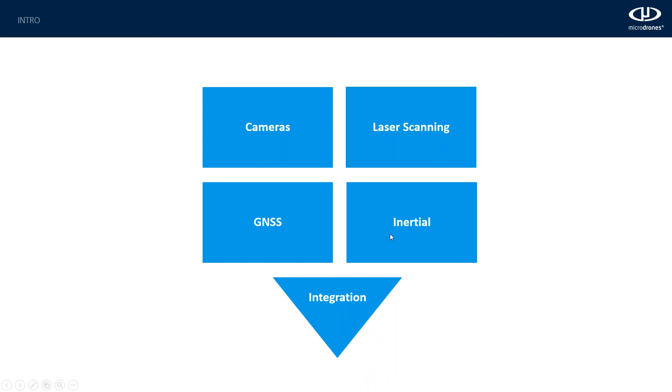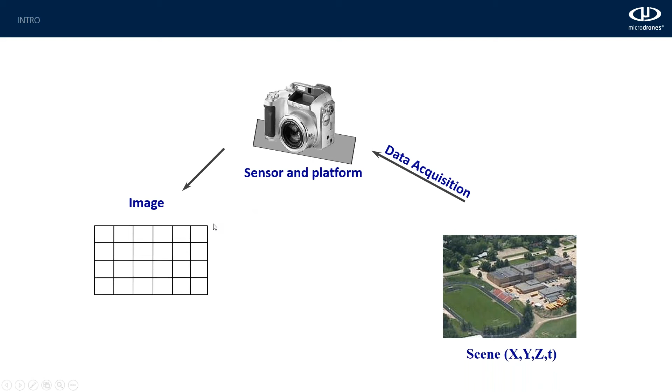Our concept here is to focus on integration rather than invention. We integrate well-proven technologies in the form of sensors such as cameras, laser scanners, GPS, and inertial measuring systems. The way we do geospatial in general, conceptually, is we acquire the data of a natural scene in 3D as an XYZ at a certain moment of time using a sensor on board the platform. The data turns into a group of pixels we call an image. Once we do the necessary data processing and adjustment in the form of 3D modeling, we bring back the 3D natural scene at that moment of time into our computers.

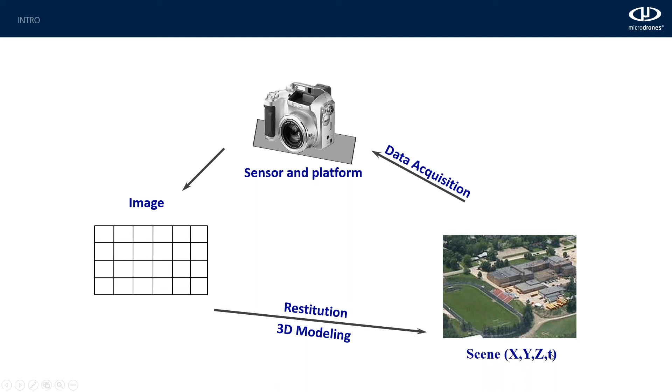A quick introduction on the sensors. We categorize sensors as active or passive. The active sensors produce or launch a pulse, and that pulse returns back to the sensor, collecting information, such as laser scanners or radars. Passive sensors, such as cameras, release a shutter and collect an image directly.

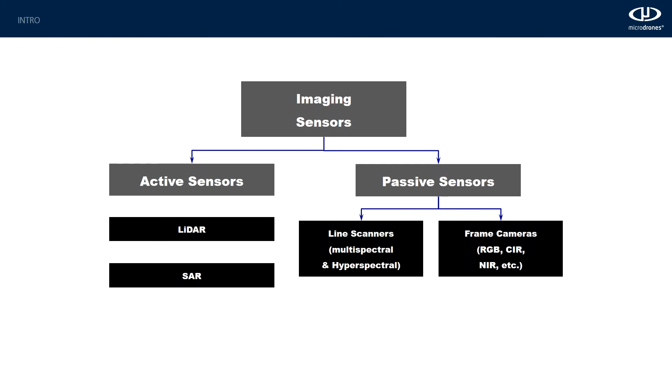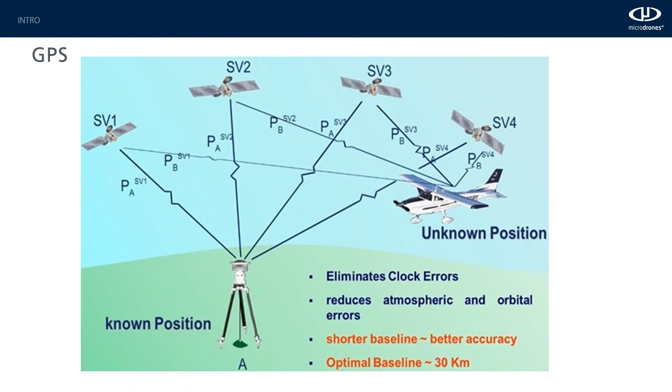GPS has been used since the 70s when it was invented, in many applications. It started in the military domain, and it actually ended up in the civilian domain in the late 80s. You now have it in your watch, in your cell phone, in your car for navigation purposes, for recreation purposes like hiking and biking, as well as what we do with it in the precision mapping field.

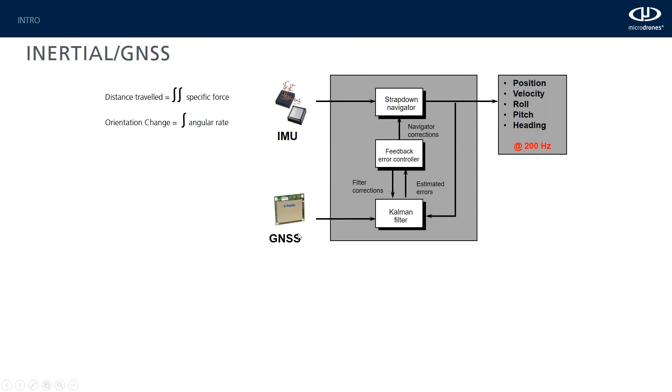We integrated inertial measuring units together with GPS in order to determine the position, velocity, and 3 angles - roll, pitch, and heading - of any platform, either driving or flying. In our case, the drone is flying at 200 times per second.

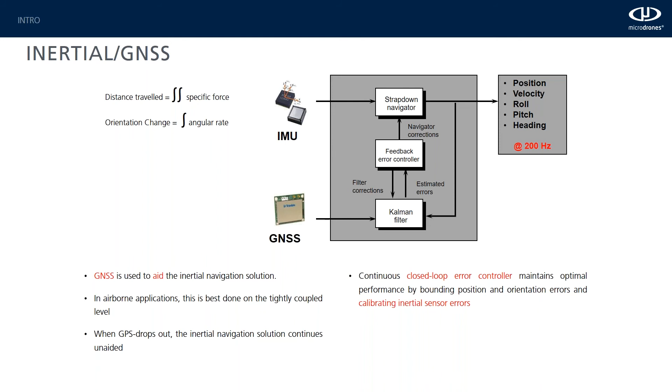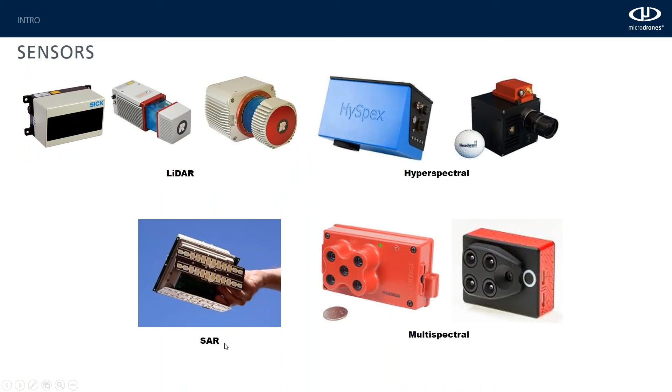Applications - believe it or not, one of the applications used most in the geospatial industry is automotive. Folks at Toyota, Ford, Audi, BMW, and so on use multiple sensors in a great assembly - cameras, lasers, and radars - and integrate that to help with the design of the vehicles, as well as aerodynamic studies and crash testing, and so on.

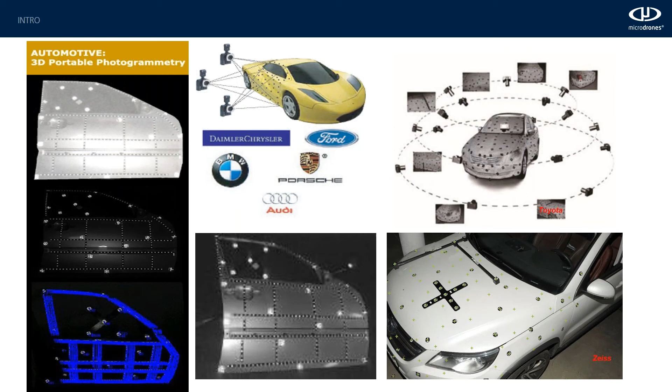In aerospace engineering, the picture on the right shows the polka dot test recently done by NASA, US Navy, FAA, and DLR, the German space agency, a collaboration to crash test a vehicle. The dots all over the vehicle body are measured down to sub-millimeter accuracy.

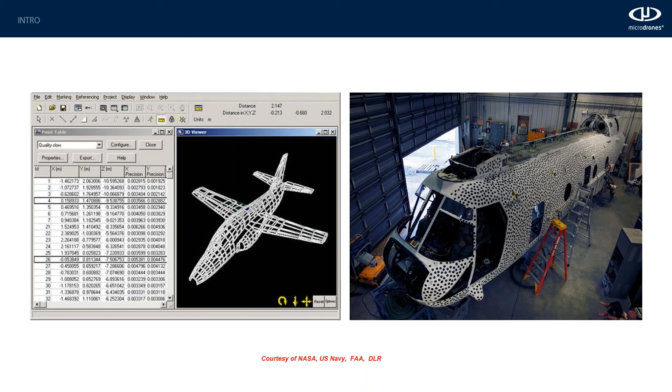In the geospatial field, we use geospatial science in the form of airborne mapping, either manned or unmanned, which is the topic of our webinar today, or mobile mapping on the ground.

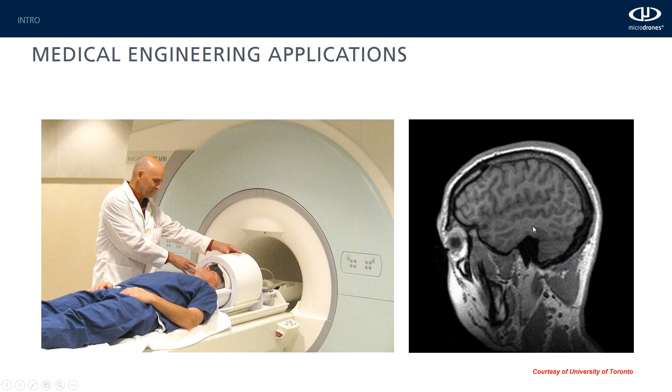As far as products are concerned, we end up with something called orthophotography. The picture on the left shows a typical airborne image where you can see the sides of buildings, and the orthophoto version, after a certain processing workflow, becomes a high precision map that doesn't show the sides of buildings.

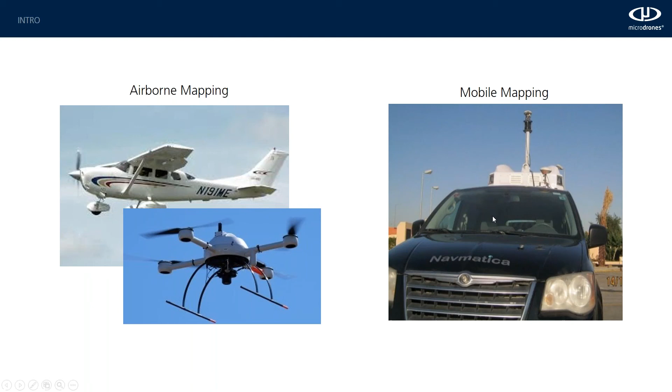This is a topographic 3D model, a triangulated irregular network showing the break lines, and a standard 2D planimetric map. This is a LiDAR product called a 3D point cloud, showing high tension transmission lines and their towers. The last picture shows a 3D photorealistic city model.

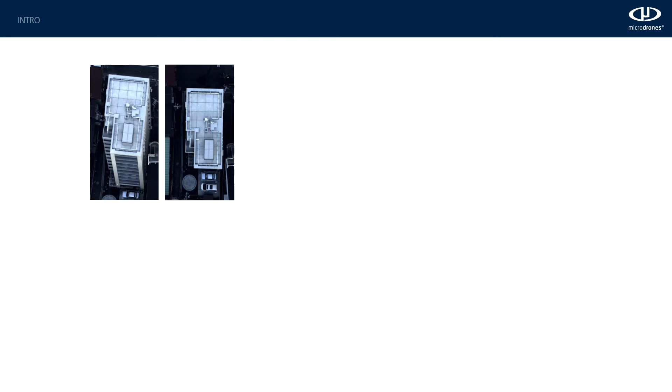As far as the data is concerned, we have digital frame imagery, video imagery, and LiDAR, or laser scanning imagery. You can tell from the picture on the left that the precision, because of the density of the 3D point cloud, is so high you could imagine it's an image, although it's not.

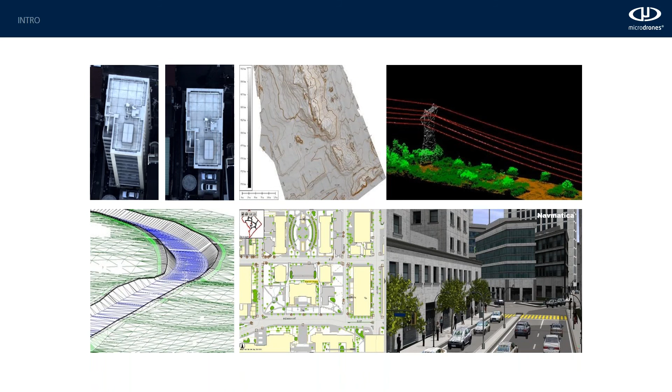So now you have a sense of how this technology evolved, where it came from, and where we are today in terms of using it for surveying and mapping. Chuck Dorgan, our sales director for the U.S., has traveled the far corners of the country for the last year and a half, discussing these topics with customers and companies interested in employing this technology.

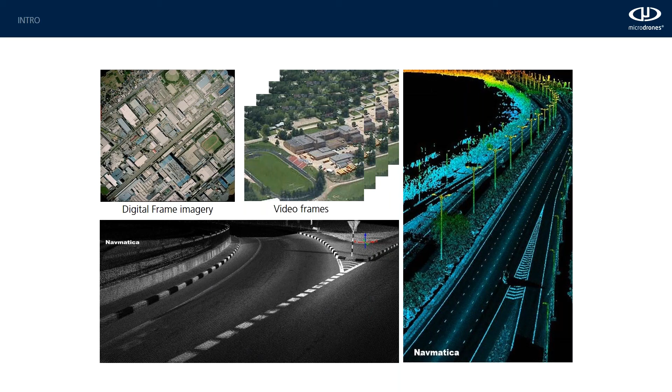So we're going to start the Q&A section of our presentation. Question number one, Chuck: why use drones for surveying and mapping? Why would I want to consider this? Great question, Mike, and I hear this very often.

It's quite simple. It saves time, gets more done, improves worker safety, and takes away from parts of the job that are dangerous, dull, or dirty. It's more competitive—people are asking for drones for surveying. I've had customers literally come to me and say they need to be using drones because some of their biggest customers are asking for it. It also lets you collect data without shutting down regular groundwork, which touches on safety as well.

And for all the surveyors on the call, with our DG solution, which stands for direct georeferencing, you can slash post-processing times and eliminate the need for GCPs. Mohammed will talk a little more about that after my presentation.

What about the Juniper Flats Basin Survey project you recently worked on, Chuck? Oh yeah, this is a great project out in Riverside County, California. The Riverside County mission statement for this project was to protect people, property, and watersheds from damage and destruction from flood and stormwaters, and to conserve, reclaim, and save such waters for beneficial use.

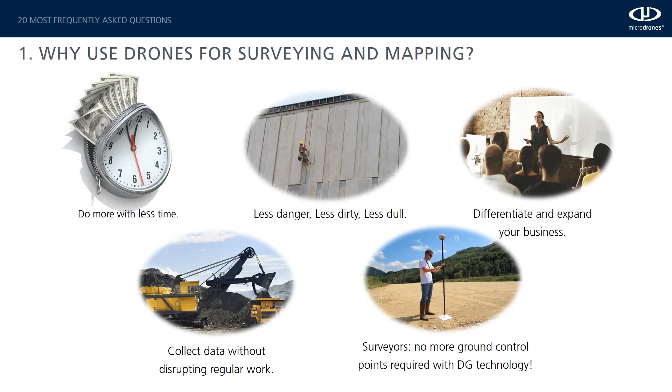The key question from them was: was the reservoir built to specifications? This project was nice because some of the survey work had already been done, so they could compare what we did side by side to what was already done.

So why use the mdMapper1000DG? First, you're getting survey grade results—it's very accurate, and it's fast to collect and process the data. One contributor to that is not having to install ground control points. Some important benefits are that it condenses the project schedule from weeks or months into one day. This is live data from an actual project we did side by side.

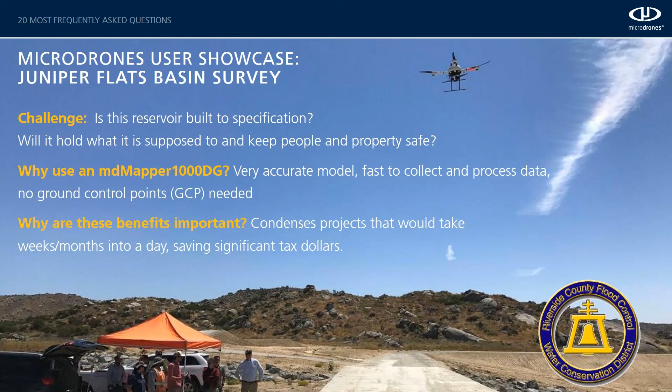Here are some of the flight profiles and parameters. We surveyed and mapped an area of 37 acres, flying at a height of 120 meters (400 feet), the maximum height allowed for small UAS in the United States. The flight speed was 6 meters per second. We took 72 images, the GSD was 1.7 to 1.8 centimeters, and the flight time was only 8 minutes.

So literally less than 2 hours later, after collecting all the data from the job site, we have a digital surface model. For those that aren't in the surveying business, it might not look very attractive, but the supervising land surveyor, Joshua Tremba, was ecstatic with these results, and was shocked by how quickly we could do this.

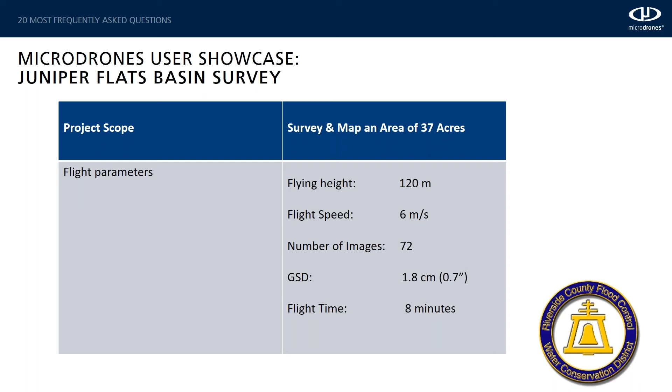So this is a key point here. Collecting imagery and showing some pretty pictures isn't much unless you have accuracy. You've got to be able to meet the customer's requirements.

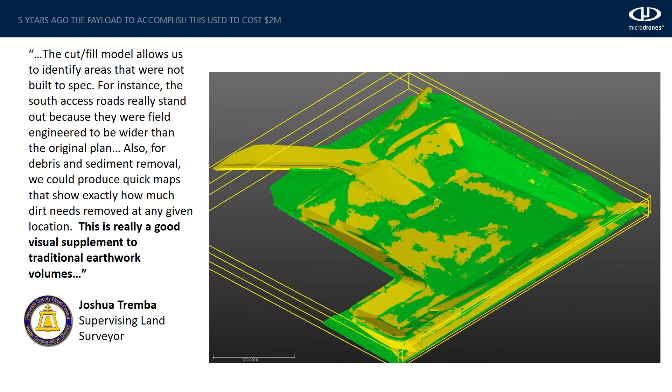So for this project, we had 11 points on the project. One was the ground control point that we used in processing the data. The other 10 points were just used as checkpoints to check our accuracy. And the accuracy actually fell right within our advertised accuracy of 1 centimeter in X, 2 centimeters in Y, and 5 centimeters in Z. So very good results.

All right, Chuck, thank you. What about getting started with using drones? It sounds complicated. Is it?

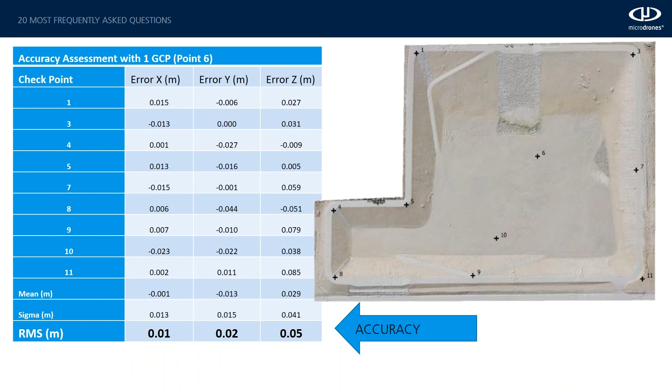Is it hard? No, it's very easy. I have to give props to the FAA for doing a good job of turning the ship around, because it was not easy back in the day. But in August of 2016, they introduced Part 107, and it is really easy now. Just about anyone can go out there.

Basically, you want to find a UAS that's a good match for your application. A hint would be a salesperson should start asking you questions about your business and not so much about the specifications of the drone. It's important to meet the needs of your customers.

Getting your Part 107 remote operator's license, which I'll talk about in more depth later. Learn to use your drone system, and that's one of the things we focus on. It's one of our core competencies, our MD Academy. We're great at training our customers. After MD Academy, you're fully qualified to fly missions, plan missions, fly them, and collect the data. Most flights are automated, so it's very easy to get started.

And MICRODRONES technical support has a turnaround time within 1 business day when you have questions or issues along the way.

What about regulations, Chuck? Well, I gotta say they're pretty straightforward and easy to understand. It's not a long list of regulations you need to know about. There's a few and they're easy to know.

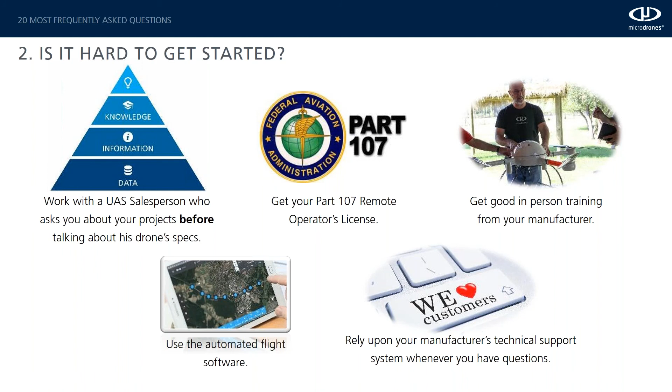The first one is you have to pass the initial aeronautical knowledge test at one of the 690 FAA test centers around the country. On their website, you can pull up a PDF listed by state. I'll be more than happy to share that with anyone who has trouble finding it.

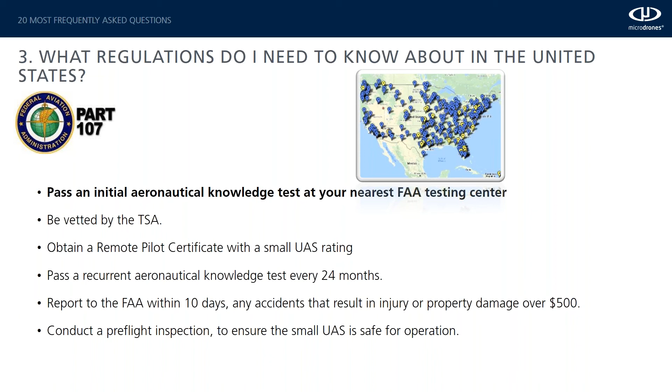You have to be vetted by the Transportation Security Administration. Obtaining a remote pilot certificate with a small UAS rating, like existing pilot airman certificates, never expires. And you have to have a recurrent aeronautical knowledge test every 24 months. It's more of a little refresher.

You have to remember to report any accidents to the FAA within 10 days of any operation that results in an injury or property damage of over $500.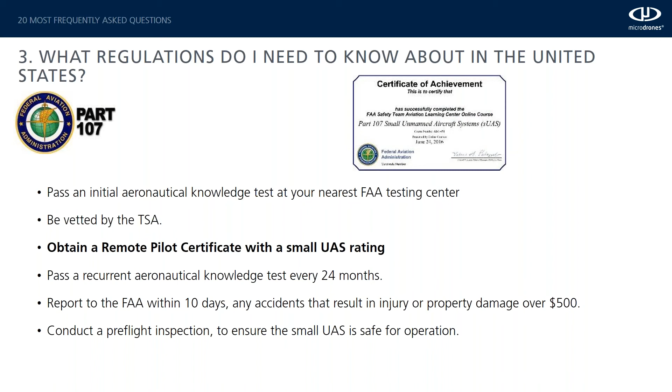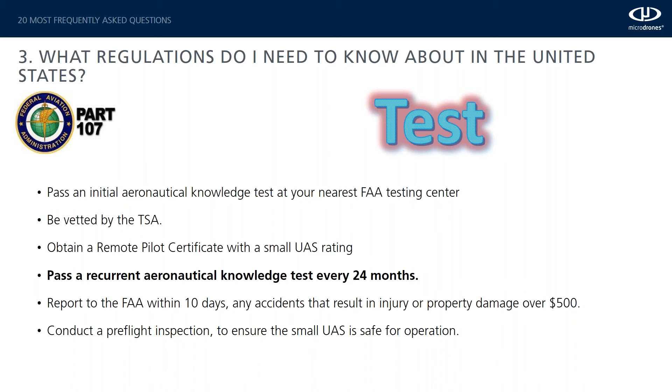And conduct a pre-flight inspection to include specific aircraft and control station systems checks to ensure the small UAS is safe for operations. MICRODRONES provides this checklist with all of our systems, so we make it easy for you.

And in some of the other basics, for most of these, you can apply for a waiver, and if you have justification and mitigating controls, you usually can get these waived.

But you must fly during daylight. You can't be flying after dusk. You have to fly under 400 feet; this is the ceiling for class small UAS. You have to establish direct line of sight, no flying beyond line of sight, no flying in national parks, no flying directly over people. A lot of it's straightforward, common sense.

Now we provide this Cliff Notes overview of what the regulations are, but obviously the Federal Aviation Administration website is your best resource. So we provide the link here. Anybody who needs that after the call, send us a message and we'll get it to you. And when you go to their search bar, you can enter the keywords we have here and you'll be able to find everything you need related to becoming a pilot.

Chuck, what about when someone decides to work with you or with MICRODRONES, will they have help along the way or do they have to figure it out on their own? Oh, they'll have all the help they ever wanted. That's probably one of the things, one of the feedback I get back from our customers all the time, is how helpful we are.

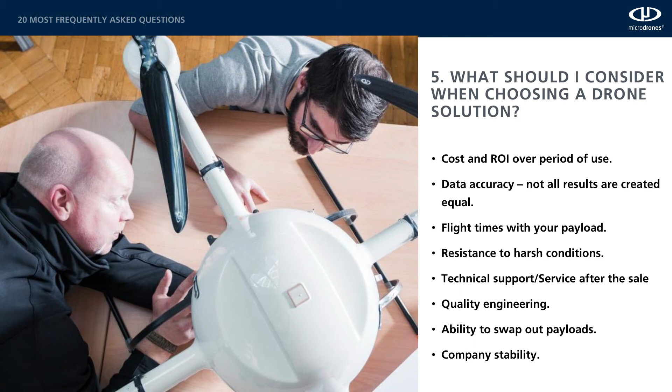The marketing and PR support, MICRODRONES has a world-class marketing department there to help you with your business, and customers love it. We're there to support. What other things should people consider when they're choosing a drone solution? There's a lot of products out there in the market. What are the main things to think about, Chuck?

Good question. Cost over time and ROI are obviously key factors. Data accuracy - not all results are created equal, make sure you choose a professional system. There's a lot of systems out there that folks would look at because of the price tag, but at the end of the day, if your data is not accurate, then you've wasted your time.

The flight times with specific payloads are probably one of the very first reasons why folks will turn to MICRODRONES. We have industry-leading flight times. Resistance to environmental changes - temperature, heat, cold, wind, rain, all that kind of stuff is important. You don't want your drone, your investment, to be destroyed by adverse weather.

Technical support, quality engineering, ability to swap out payloads is another key thing. I call our MD4 1000 kind of like the Swiss Army knife - you can do lots of different things with it. And company stability - how long has that company been in business? There's a lot of overnight businesses out there. It's the Wild West, so be careful and do your research.

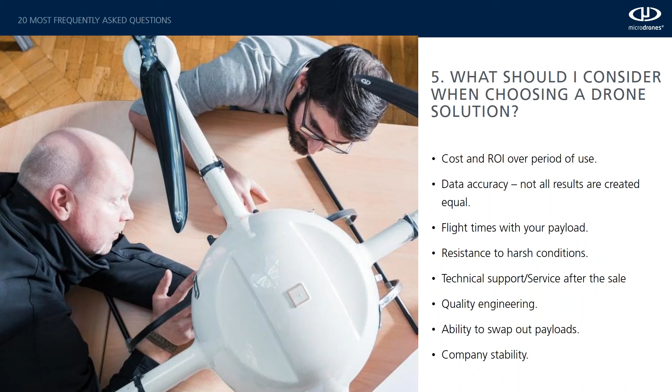Thank you, Chuck. What about the difference between buying a drone to do work and buying a complete UAV solution? What does that term really mean? That is a really good question. There's a lot of confusion out there with that because there is a specific difference between them. A drone is an aircraft.

If you have an aircraft and you want to do something with it, the user must figure out what sensors to use, how to integrate it, how to mount it, the software. There's a lot of science behind it, and MICRODRONES has taken all that out - we've done it and figured it out for you.

A UAS, unmanned aerial solution, is different than a drone. It's a complete UAV solution like MD Mapper that includes everything you need to perform specific applications. So we've done all the hard work for you. It's taken us years to master it, but we've done it, and we've done it with the latest and greatest technology.

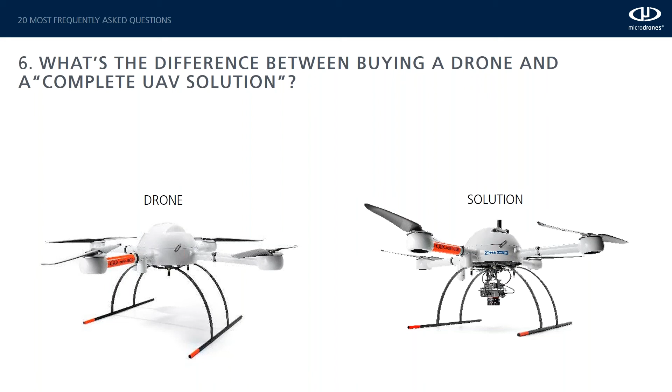So in terms of microdrones, Chuck, what complete surveying solutions do you offer today? We have three packages here. Starting from left to right, we have the MD Mapper 200, using the MD4 200 airframe, which carries just over a pound, has a flight time of 15 to 20 minutes, and covers about 70, 80 acres of mapping acreage on a single battery charge.

The MD Mapper 1000 is the MD4 1000 airframe with an Alpha 6300 camera underneath it. It's a 24 megapixel camera, so it's professional grade. You get fantastic results with it, but you do need to install ground control points to use it.

To the far right, probably our best seller in 2017 so far is our MD Mapper 1000 DG, which stands for direct georeferencing. That's again using the MD4 1000 airframe, but it has a Sony RX1 R2 camera, which is 42 megapixels, and it uses the Applanix APX15 board, which has its own dual GNSS receiver and IMU, and does not require ground control points.

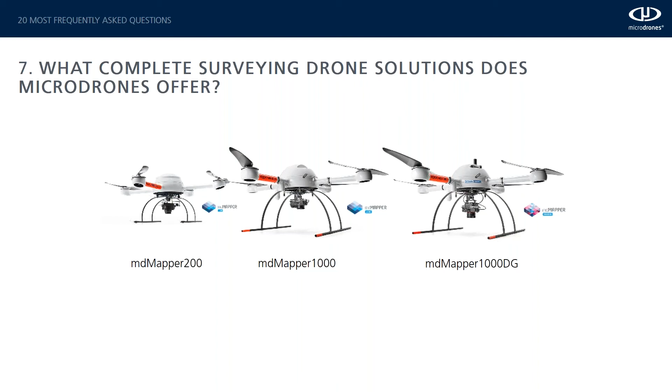There's a question here on how MicroDrones Mapper solutions save time in the field. So we have a side-by-side comparison between the Mapper 1000 and the DG. Looking at the time savings, the very first one is not having to install ground control points, and it's roughly 2 hours, give or take, whether it's 1 hour, 3 hours, or 4 hours.

It's a big chunk of time that you have, so you'll get about a 2 hour savings in this scenario here.

The flight time is 35 minutes for the Mapper 1000, where you can reduce that with the Mapper 1000 DG, saving you 20 minutes. The data processing is 12 hours for the Mapper 1000, where the Mapper 1000 DG is only 4, saving you 8 hours. So if you total this whole thing up, you're looking at 15 and a half hours for the Mapper 1000, 5 hours for the DG, saving you 10 hours and 20 minutes by using the DG system.

And I think, Chuck, in terms of the data processing, typically it's about 40% of the time is work and prep, and the remainder is processing time or rendering time, correct?

That is a great point. So what Mike has brought up is it's not push button. 40% of that time you're seeing there, you have someone at the computer that understands the data, doing some work, identifying the ground control points on the ground and so forth. So it's not a push button and walk away and let the computer just grind away at it. About 40% of those times are manual, but the remainder is the computer doing the work too. So that's a good thing.

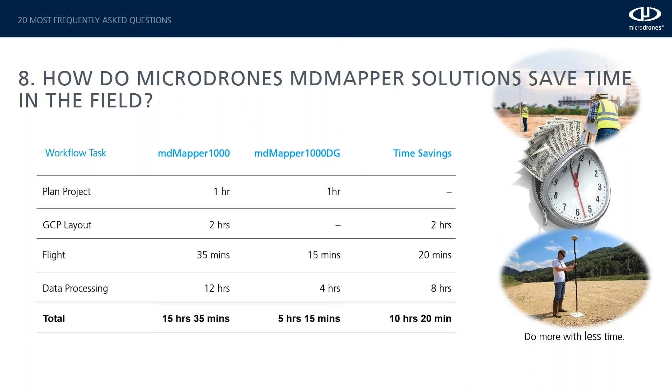How long do MicroDrones UAVs fly on a single battery charge?

Industry leading. That's, like I mentioned before, one of the main reasons we get contacted is because of those industry leading flight times of 30 to 45 minutes with a payload on one battery charge. Obviously the 30 to 45 minutes is a big variance, but the weather has a lot to do with it. Wind, your payload, your altitude, and your temperature all play a factor in there.

One of the things that I'm very excited about is we just recently released Resume Flight. In the past, if you had a 2 or 3 hour mission, as you're using the MD Cockpit software, it's going to tell you approximately how long that flight's going to be as you're creating it. So if you're doing a mission and you have a 2 hour mission, you're like, well, I can't do this with one battery. So you'd split it up into 2 or 3 missions.

Now with Resume Flight, you can continue to move forward with that 2 hour mission, launch the drone into the air, put it in waypoint mode, let it do its thing, and when it's time to bring it back to change the battery out, you take it out of waypoint mode, bring it back, land it, change the battery, launch it again, and put it back into waypoint mode, and it will start where it left off.

This is key for post-processing. Now your analyst back in the office doesn't have to try to marry up 2 or 3 data sets. They have one complete data set.

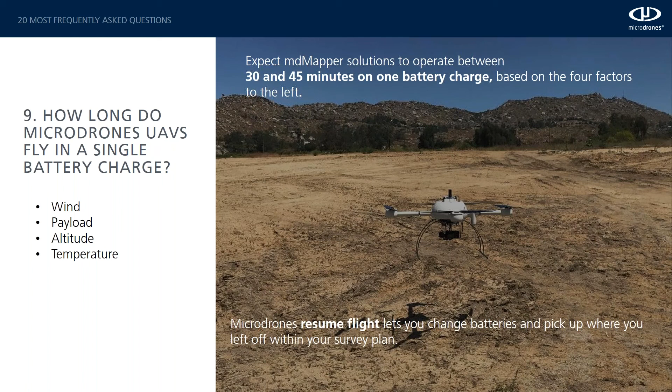What about if the weather's bad? And for those in New York, this thing would be sitting at the desk like 300 days out of the year if it wasn't for being as robust as it is. It can handle winds of up to 20 miles per hour, up to 25 mile per hour gusts. Be careful above that. I don't recommend flying over 20 miles per hour wind, but that is pretty strong wind. We've done some mapping missions in wind that strong, and it's amazing, to be honest with you.

Rain up to 45-degree angle rains, torrential downpours will not bring this thing down. Although photogrammetry results are not ideal in the rain, at least your investment's not going to get destroyed if a rainstorm comes in. Snow, no problem. Dust, heat, and cold, we can operate up to 112 degrees Fahrenheit and as low as 14 degrees Fahrenheit. So we fly all winter long, and it's resistant to electromagnetic fields around power lines and things like that.

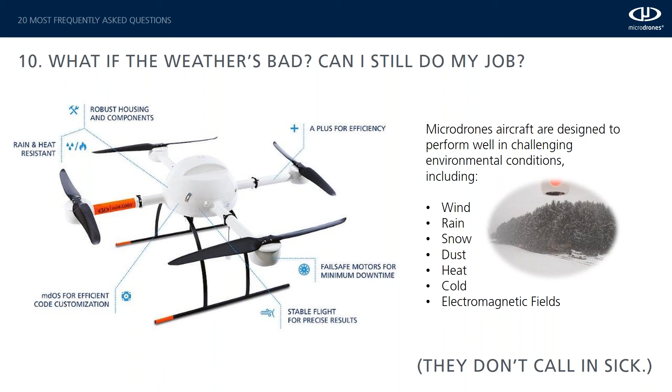What about on the job safety? Are there ways to improve that for your employees by using UAVs?

Yep, and this is actually a good selling point for folks that are interested in getting into UAVs but are getting resistance within their company. Safety is always important with all companies, obviously, and this is an angle that everyone should think about because it's real.

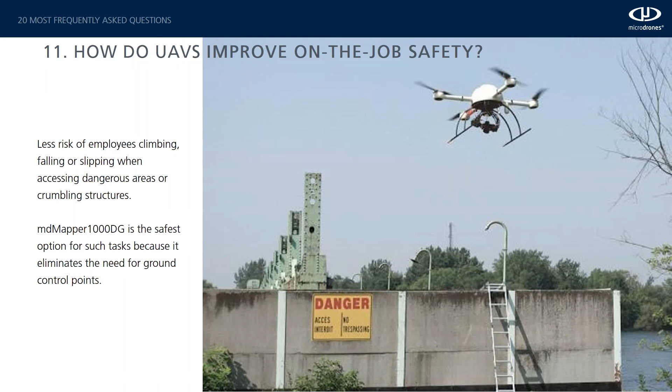You don't have to put humans on high structures like wind turbines and things like that, or dilapidated dams where concrete's falling apart. So it's obviously safer that way. Great for dangerous industries like mining and construction. In the past, you'd have to shut down part of a mine to measure piles of whatever your inventory may be. You don't have to do that, and you also don't have to put any boots on the ground, as they call it. Same with construction. Anytime you can keep a person off a construction site that doesn't necessarily need to be there, that's obviously safer. And like I said before, access to crumbling structures.

What about flight planning, monitoring, and extracting the data afterwards?

Well, it's funny, I say this all the time - it's so easy that even a sales guy can do it. I have my own tablet with MD Cockpit loaded on it to prove it. Planning the flight is simple using MD Cockpit. You just call up the location, which utilizes Google Earth, use your fingertip to draw a polygon around the area you want mapped, and select your camera/sensor, because the software will be looking for certain sensor parameters. The process takes less than 5 minutes the first time. And if you have a regular mission you want to fly repeatedly, you can save it and use it in the future - just pull it up.

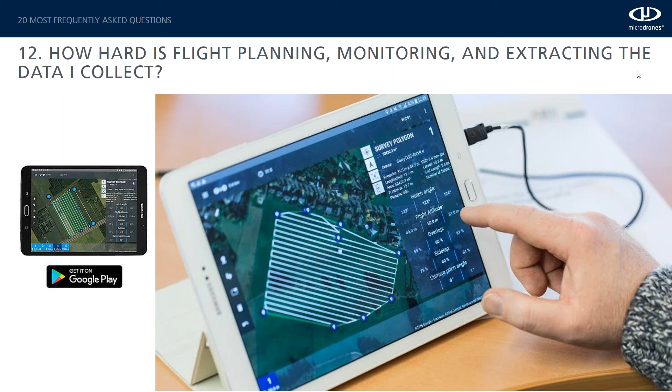You also use the MD Cockpit tablet to monitor the mission's real-time telemetry data. And extracting the data can be accomplished in minutes via Bluetooth.

What about special insurance? Do I have to invest in insurance to use a UAV for my business, Chuck? No. Interestingly enough, the FAA is currently not requiring companies to have liability insurance. Not sure how long that's going to last - a smart business person would probably recommend at least having liability insurance. But not to worry, because surprisingly, the insurance premiums are rapidly dropping and are pretty affordable right now.

What about adoption that you're seeing out in the field, Chuck? What kind of energy and urgency are you seeing for surveying and mapping companies to adopt this new technology? I get a text message or an email on a daily basis with an article about this from friends and family. I'd have to say the commercial market is about to explode.

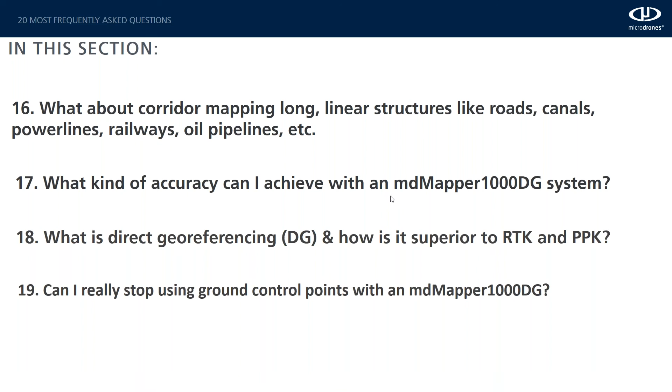So I'm now going to turn control back over to Dr. Mostafa, and let's change this slide. Oh, here we go. Well, I will start addressing those questions, Mike, by introducing the concept of georeferencing in the geospatial field, or in photogrammetry.

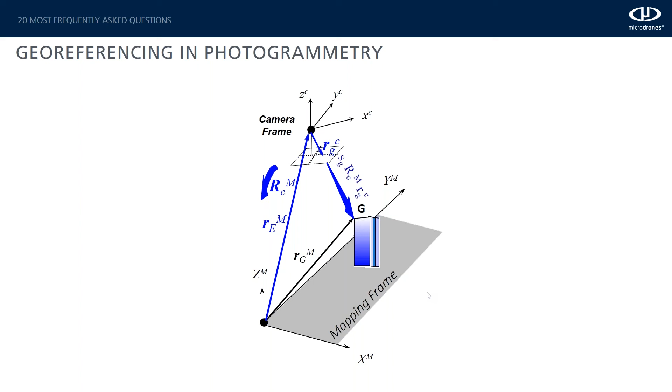Georeferencing means you're referencing some piece of information to the ground, or to the geo, which is the globe. For example, your zip code is a georeferencing piece of information because it puts your house on the map for the postal service - all you need to know is the zip code, and you don't care much about the address. So in the mapping industry, georeferencing is where we try to reference an image, a laser pulse, a radar pulse, or any piece of information measured up in the air on board the drone, to a mapping frame of reference on the ground to produce our mapping products.

Two technologies are available. The old technology is called aerial triangulation. Lately it's been called structure from motion, which is pretty much the same thing.

Practically, this technology is all about the ground control points. Ground control points are points you establish on the ground and survey using GPS. It's a long, tedious and laborious process, and requires access to the mapping area at all times to establish those ground control points. That's a prohibitive feature right there. Ground control points are needed at all times.

Then we do some measurements and computations, and that's the name of the game with this technology: you compute where your camera was at the moment of image acquisition, and the angles of the camera with respect to that mapping frame of reference. Then you produce the mapping products.

What we have done is integrate a technology called direct georeferencing, which is centered around measuring everything up in the air. We acquire the image, laser scan, laser pulse, or radar pulse together with GNSS and inertial data. That allows us to be flying free like a bird. We don't need any information on the ground, such as ground control points.

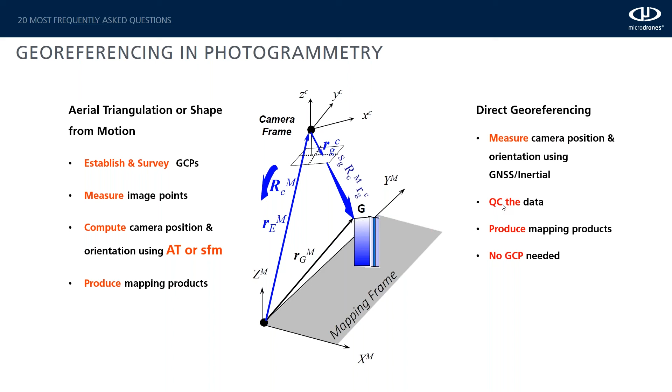After that, we run some quality control procedures and then produce the mapping products with no need for ground control points, unless you would like to assess your geometric accuracy using some checkpoints.

Now, the way it actually works is that what you're looking at is the full description of the mathematical model. I'm not going to go through this, but I want to mention that all of these parameters, such as the measurable quantities, the caveats such as spatial offsets between the GPS antenna on board the drone and the inertial measuring unit, and the rotations between different coordinate systems represented here in the form of matrices—all of that mathematical description has been well taken care of, sitting in a really user-friendly software.

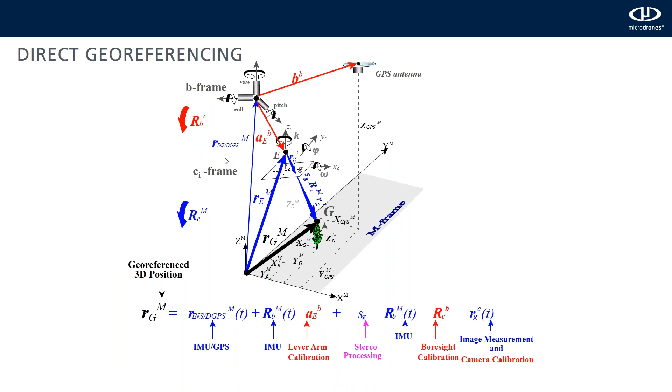From the user perspective, they have the best science available currently, already programmed in easy-to-use software. On top of that, there is an error budget, meaning we take a look at every single source of error coming from GPS, inertial, imaging, or laser. We did our homework analyzing all these errors and produced our error budget models, so the user doesn't have to pay attention to that—it's in the form of a workflow procedure, easy to use.

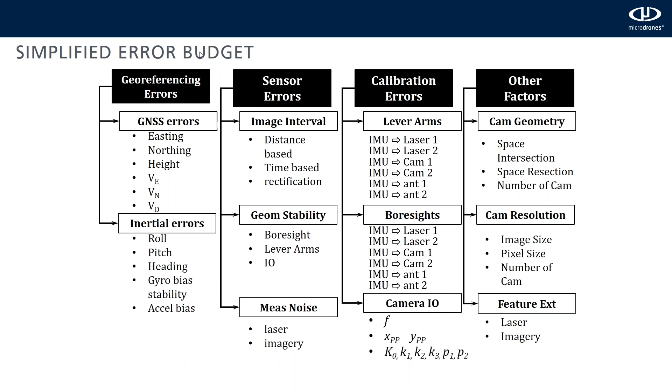Now, what direct georeferencing does for us is actually allow our drone to fly really free, with no necessity of having access to the site on the ground to establish ground control points.

For example, we can capture one image and add a digital elevation model to produce an ortho from one image. We could do the same for a stereo pair or a strip or flight line of images. That's a key differentiator between direct georeferencing and traditional aerial triangulation or structure from motion, because we can handle the corridor mapping domain. Corridor mapping constitutes around 60 to 70% of all mapping products or projects around the globe: transportation networks, inspection, railroad tracks, high transmission power lines, and so on.

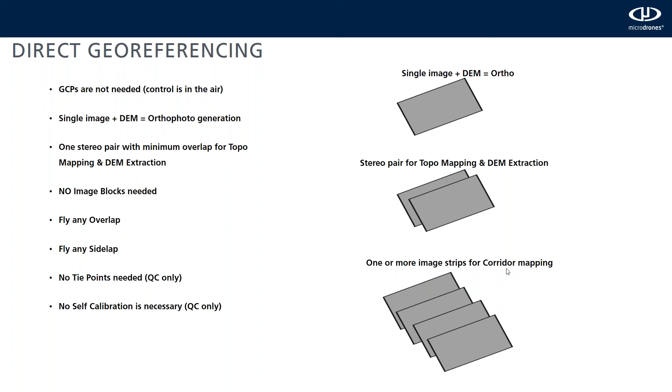A real-world example, on top of the one Chuck illustrated from Juniper Flats in California: here's another from the Fryer Dam in Quebec, Canada. We were not allowed any access to the dam, and the only way to survey and map it was to fly above it without doing anything on the dam itself. So we established a couple of checkpoints on one end and 3 checkpoints at the other end, and we flew 2 flight lines, 12 minutes of flying time, at 14 kilometers an hour platform speed, with those checkpoints around each end of the dam.

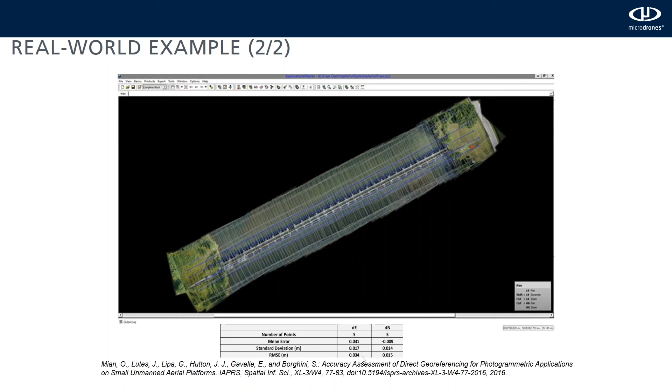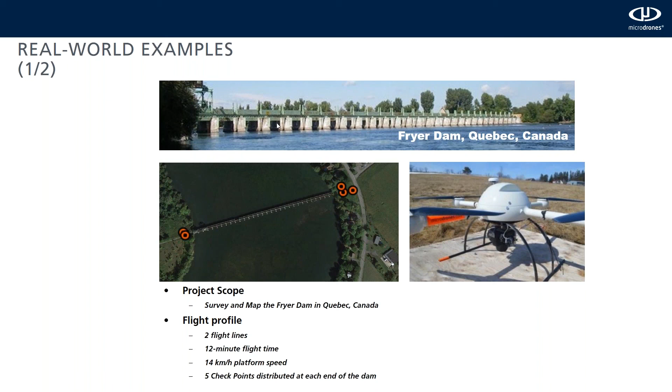The final product is a true ortho, with an accuracy of 3 centimeters in easting and 1.5 centimeters in northing. That summarizes the capability of flying a drone equipped with the DG system—the entire solution could map a large structure like this with 12 minutes of flying time and a couple of hours of data processing to produce a final mapping product of this quality. That concludes my presentation; I'll address your questions, Mike.

Thank you very much, Dr. Mostafa.